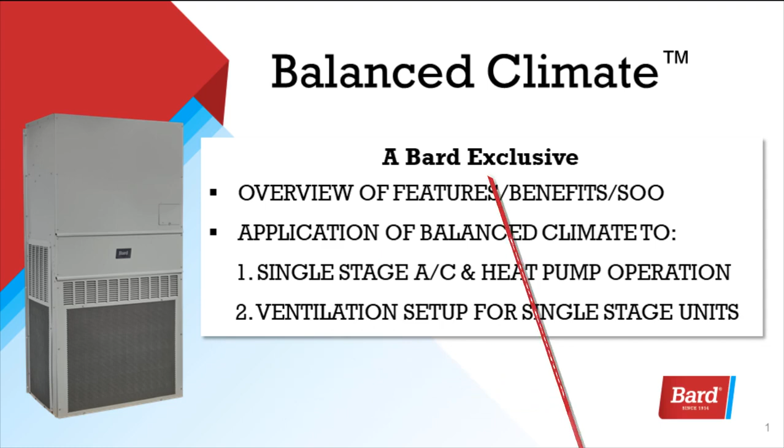Bard units are equipped with the capability of running in balanced climate mode as they are re-engineered to the 2019 Department of Energy standards. The remaining two-stage units already above the standard will have this feature added over the next 12 months as they are upgraded to the new cabinet style.

Balanced climate is designed to increase the comfort level by reducing indoor humidity. Extended runtime with reduced airflow allows the unit to extract more humidity during cooling operation. Balanced climate provides quieter operation, up to 35% less humidity in the space, depending on the model and conditions. It provides softer starts, warmer heat pump supply temperatures on startup, and increased comfort level.

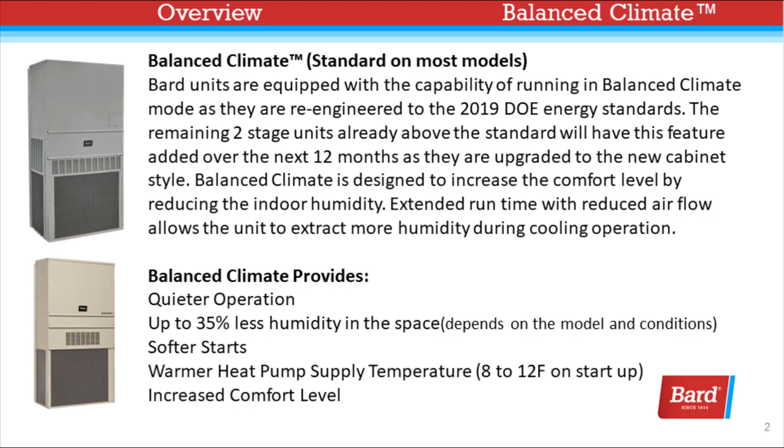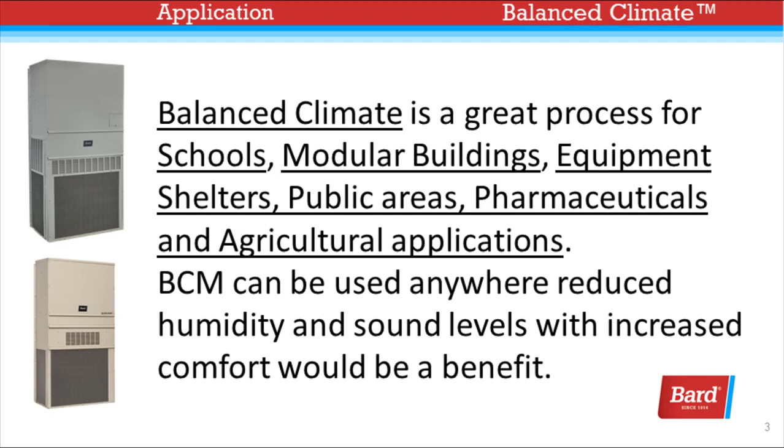Balanced climate is a great process for schools, modular buildings, equipment shelters, public areas, pharmaceutical and agricultural applications as well. Balanced climate mode can be used anywhere reduced humidity and sound levels with increased comfort would be a benefit.

All units are shipped set up to run in standard mode, just the way Bard units have been in the past. To engage balanced climate mode, simply remove the brass jumper as seen on the right between Y1 and Y2, and install a two-stage thermostat.

This applies to single-stage applications where the lowest set point is 72 degrees and no vent package is installed. Applications requiring a lower set point than 72 degrees may cause icing on the evaporator.

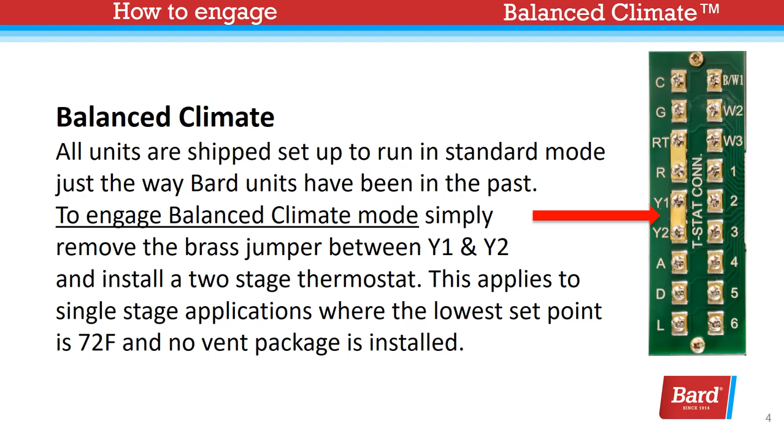Y1 will automatically bring the air conditioner on in balanced climate mode and extract the maximum amount of moisture while cooling the space. If the temperature continues to rise, stage 2 on the thermostat, Y2, will gently shift the wall mount to standard full load cooling with the rated airflow.

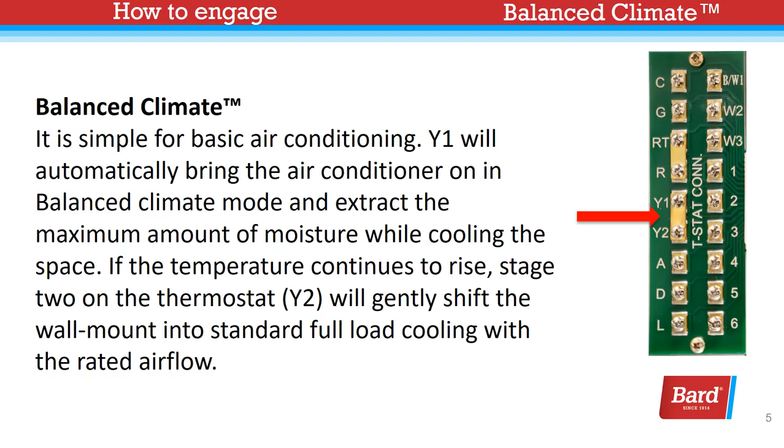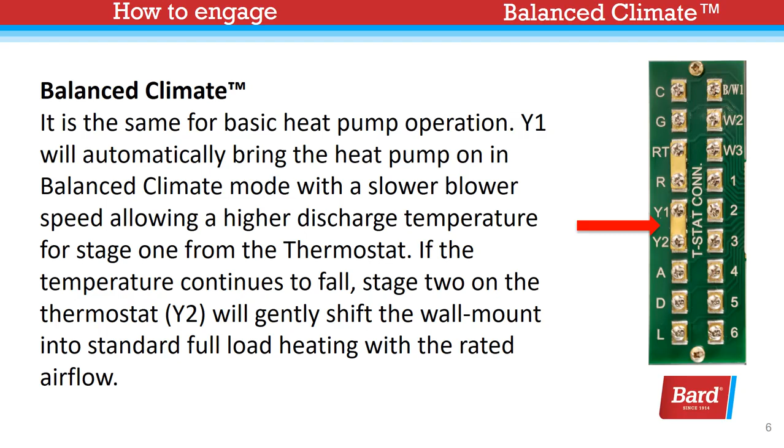It is the same for basic heat pump operation. Y1 will automatically bring the heat pump on in balanced climate mode with a slower blower speed, allowing a higher discharge temperature for stage 1 from the thermostat. If the temperature continues to fall, stage 2, or Y2, will gently shift the wall mount into standard full load heating with the rated airflow.

At the top left, the 3-ton unit, you can see 95, 80, 67 conditions produced a 24% increase in latent cooling or moisture removal. At the bottom left, 95, 75, 62 conditions, balanced climate mode latent cooling increased by 52%. For more balanced climate data, please see the model specification sheet.

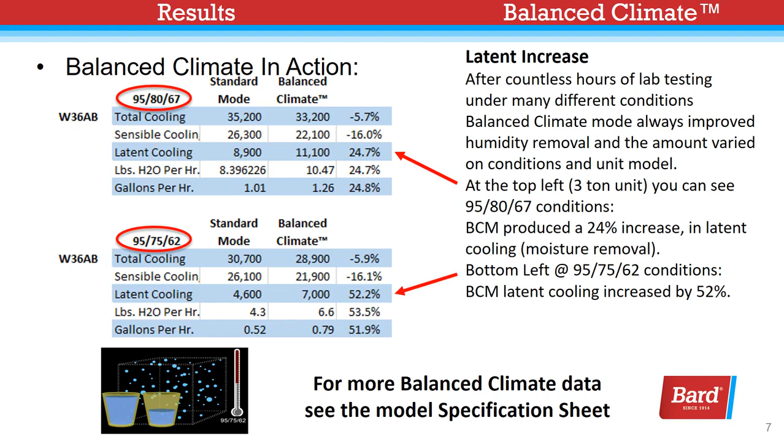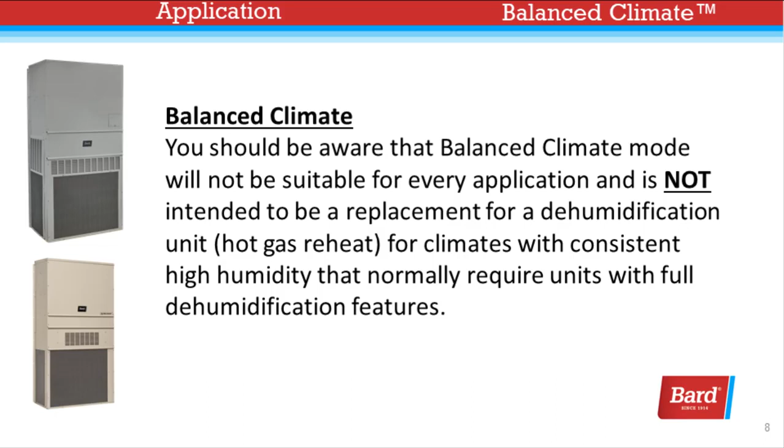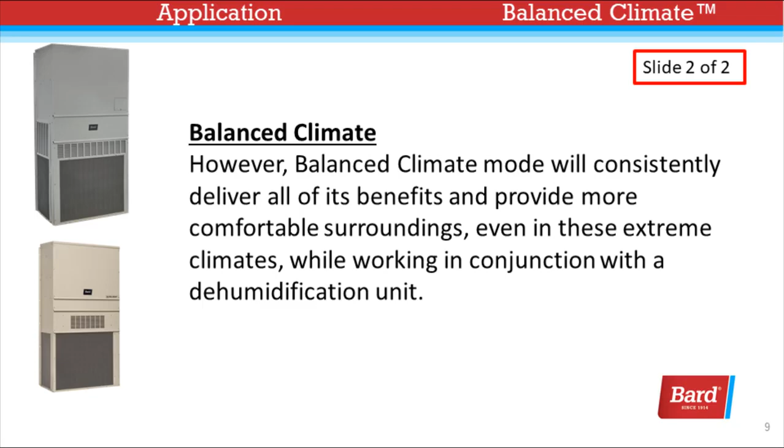You should be aware that balanced climate mode will not be suitable for every application and is not intended to be a replacement for a dehumidification unit or hot gas reheat for climates with consistent high humidity that normally require units with full dehumidification features. However, balanced climate mode will consistently deliver all of its benefits and provide more comfortable surroundings even in these extreme climates while working in conjunction with a dehumidification unit.

Also, on applications where the sensible BTUs are very close to your required BTUs, enabling balanced climate may not be the right decision. Remember, we convert some sensible BTUs to latent BTUs for dehumidification purposes.

Units with a factory installed economizer will not have the brass jumper installed. Refer to the vent manuals for instructions on how balanced climate works with each vent. There is a jumper located in the economizer to disconnect. Refer to the manual for detailed instruction.

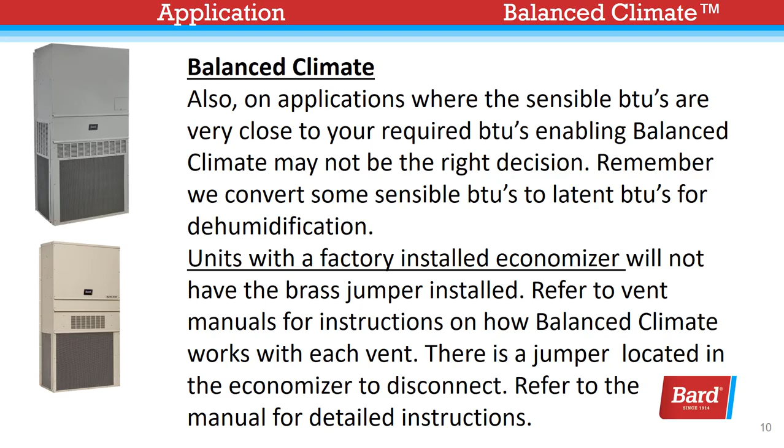If the application is likely to require air conditioning operation below 60 degrees outdoor conditions or is installed with any ventilation package, a Bard low ambient control kit must be installed.

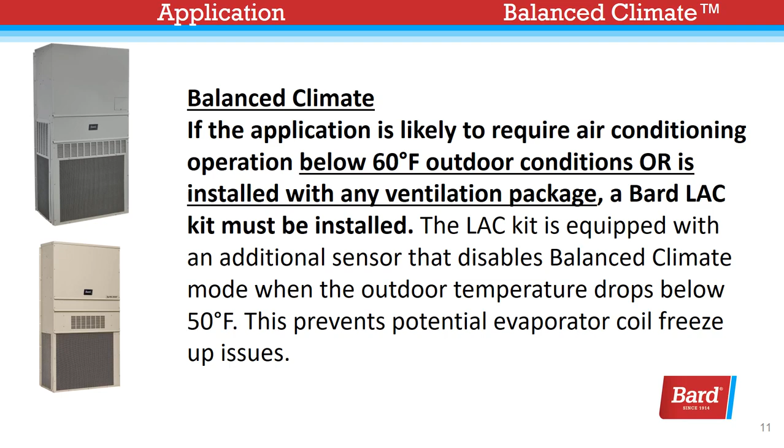The low ambient control kit is equipped with an additional sensor that disables balanced climate mode when the outdoor temperature drops below 50 degrees Fahrenheit. This prevents potential evaporator coil freeze-up issues.

Because part of balanced climate depends on lower airflow, attention needs to be directed toward the system static pressure when balanced climate mode is engaged. The system static pressure needs to be verified below 0.2 of an inch water column.

For ductless applications with the correct registers and grills, there won't be a problem. However, some ducted systems will not be a good candidate for balanced climate.

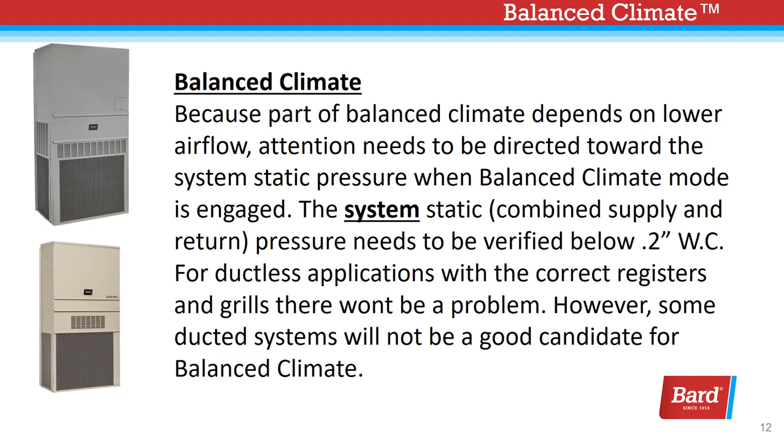Here we're looking at single-stage systems with no vent package. To operate a single-stage unit in balanced climate mode, a two-stage cooling thermostat is required. The lower indoor airflow operation is overridden by using that two-stage stat.

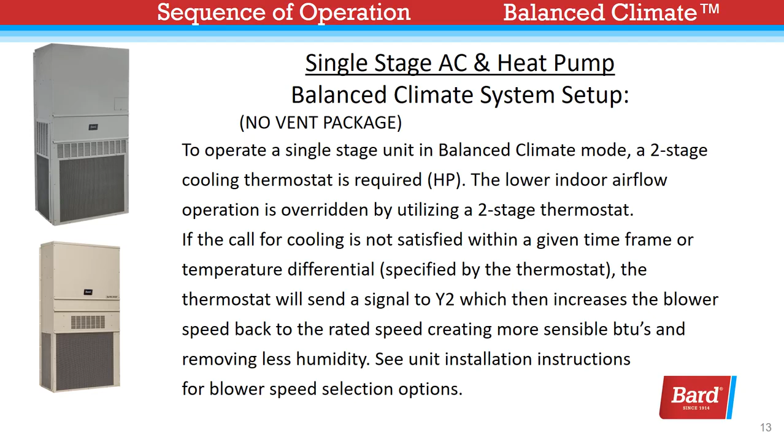If the call for cooling is not satisfied within a given time frame or temperature differential as specified by the thermostat, it will send a signal to Y2, which then increases the blower speed back to the rated speed, creating more sensible BTUs and removing less humidity. See unit installation instructions for more blower speed selection options.

With a vent package, setup will vary depending on the type of ventilation package selected. For complete instructions, please review the instructions shipped with the vent or unit if the vent is factory installed. The following slides are an overview.

The available vent options are barometric with exhaust and without exhaust, and there's no additional setup for these. The M vent option is a commercial ventilator with a simple on and off. The V is for variable on a commercial ventilator. D is for a DDC economizer with a 0 to 10 volt motor and no controls.

S, Y, and Z are economizers utilizing the Jade control, and the R package is for an ERV.

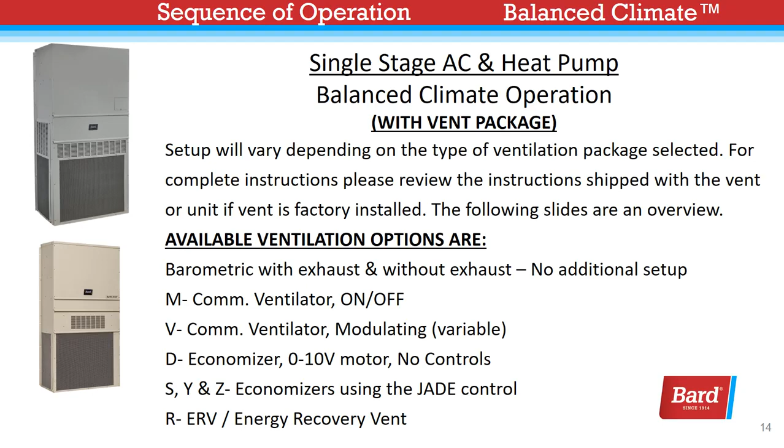For an M package, which is a partial flow commercial ventilator with simple on and off operation, units ordered with this option or field installed vent kit are shipped with a jumper from Y1 to Y2 installed. Removing this jumper activates balanced climate mode.

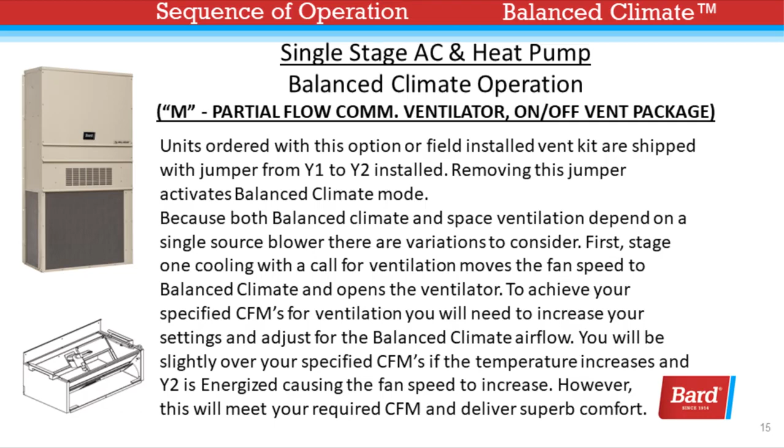Because both balanced climate and space ventilation depend on a single source blower, there are variations to consider. First, stage 1 cooling with a call for ventilation moves the fan speed to the balanced climate and opens the ventilator. To achieve your specified CFMs for ventilation, you'll need to increase your settings and adjust for the balanced climate airflow. You'll be slightly over your specified CFMs if the temperature increases and Y2 is energized, causing the fan speed to increase. However, this will meet your required CFM and deliver superb comfort.

Blade adjustment for desired ventilation air. Remember, on all the vent packages, the amount of ventilation air is dependent on 4 factors: return air duct static pressure, supply air duct static pressure, indoor blower motor speed, and the damper blade open position.

So in all cases, Bard recommends an air balance. In lieu of an air balance, we give you some suggested settings that should get you very close to what you're looking for. Refer to the appropriate graph in the manual and be sure to compensate for the balanced climate mode fan speed.

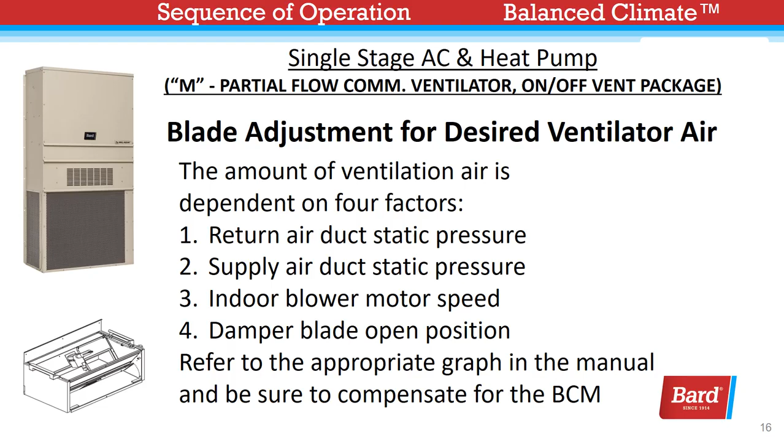For the V package, which is a commercial ventilator with variable blade operation, when engaging balanced climate with the modulating vent package, follow the instructions included with the vent. During setup, the blade will need to be adjusted to a setting between 25 and 30% more air than required for ventilation to overcome the balanced climate fan speed and meet the ventilation requirements.

However, when the speed is increased on a Y2 second stage cooling call, you will be slightly over-ventilating. The code will be met and comfort for all. If a CO2 controller is used, the damper will automatically adjust for the correct number of occupants based on CO2 and fan speed. This is a recommended setup method.

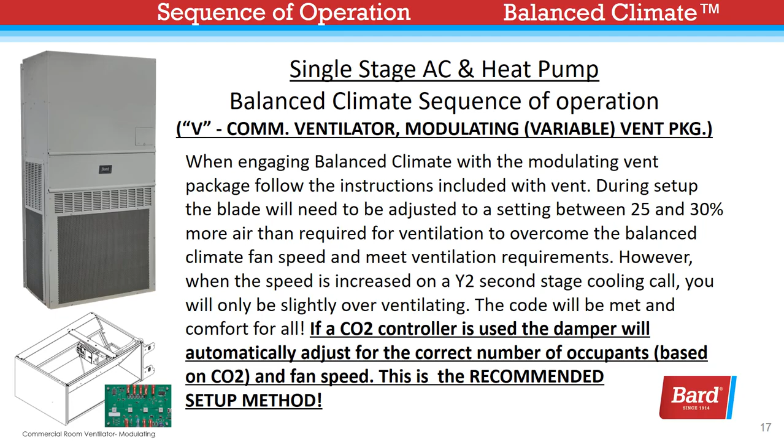When engaging balanced climate with the DDC economizer, the blade will need to be adjusted similar to the prior vent package. This is between 25 and 30% more air than required for ventilation to overcome the balanced climate fan speed and meet ventilation requirements. However, when the speed is increased on a Y2 second stage cooling call, you will only be slightly over-ventilating. The code will be met and comfort for all.

As long as you have the outputs available on your building system, you could change the blade location to correspond with the fan speed. If a CO2 controller is used, the damper will automatically adjust for the correct number of occupants based on CO2 and fan speed. This is the recommended setup method.

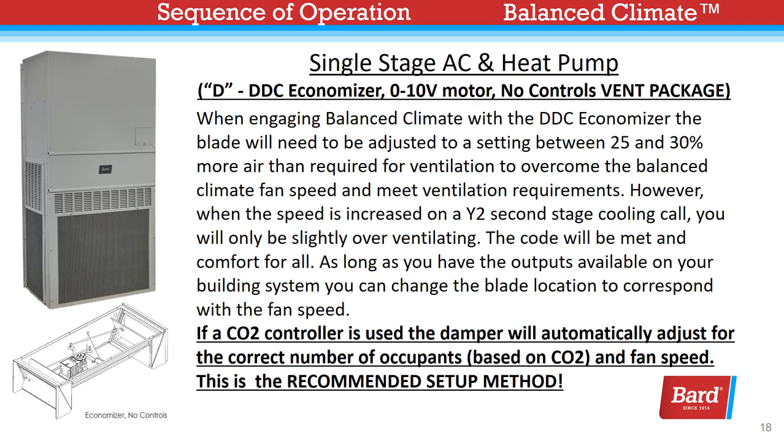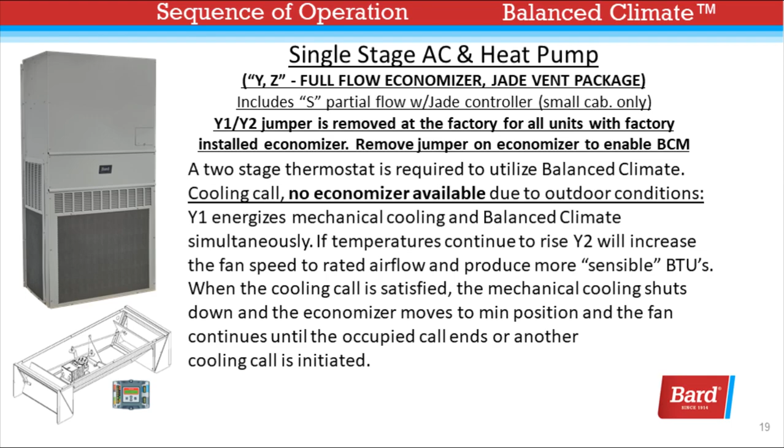For the S, Y, and Z Jade-controlled economizers, a two-stage thermostat is required to utilize balanced climate. If you have a cooling call and no economizer is available due to outdoor conditions, Y1 energizes cooling and balanced climate simultaneously. If temperatures continue to rise, Y2 will increase the fan speed to the rated airflow and produce more sensible BTUs. When the cooling call is satisfied, the mechanical cooling shuts down and the economizer moves to min position. The fan continues until the occupied call ends or another cooling call is initiated.

Here we have a cooling call with the economizer available. So in economizer-only operation, the fan operates at rated speed. The mixed air temperature sensor maintains discharge air preset temperature. If the temperature increases and more cooling is required, Y1 out and balanced climate are energized simultaneously.

So if balanced climate mode is utilized, you'll need to increase your minimum position setting by 25 to 30% above rated setup to compensate for the lower fan speed. If the temperature continues to rise and more cooling is needed, balanced climate mode will drop out, economizing will continue, and the fan will operate at rated speed along with mechanical cooling, providing the maximum amount of cooling. When cooling call is satisfied, the economizer will return to min position with rated airflow.

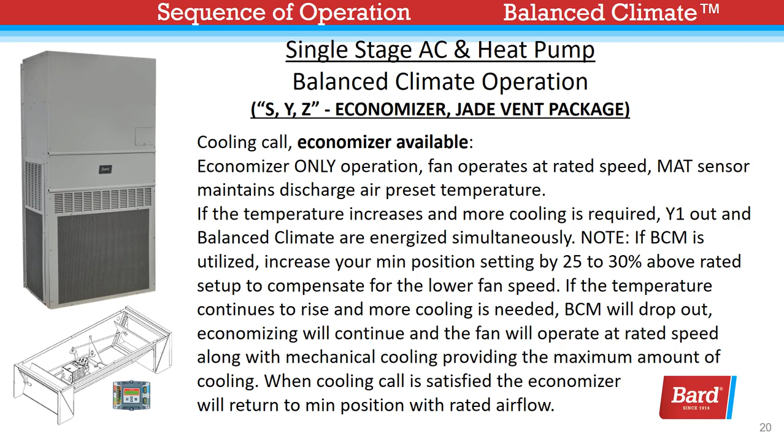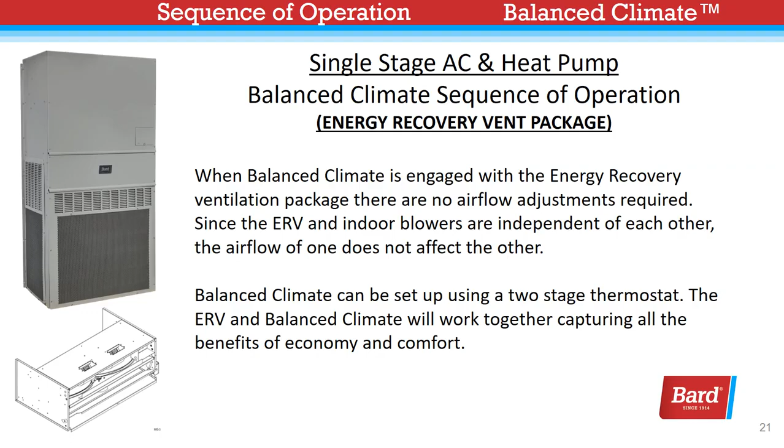When balanced climate is engaged with the energy recovery ventilation package, there are no airflow adjustments required. Since the ERV and indoor blowers are independent of each other, the airflow of one does not affect the other. Balanced climate can be set up using a two-stage thermostat. The ERV and balanced climate will work together, capturing all the benefits of economy and comfort.

Let's review this system. Bard's balanced climate mode will fit many applications. All applications require attention to airflow. We must have less than 2/10 of an inch of water column on the static pressure. The static pressure listed is system static, and that's combined supply and return numbers.

72 degrees is the lowest allowable cooling set point in balanced climate mode. If application requires cooling with the outdoor air temperature below 60 and/or a vent kit is installed, a low ambient control kit must be installed on the unit. A two-stage thermostat is required to activate balanced climate mode.

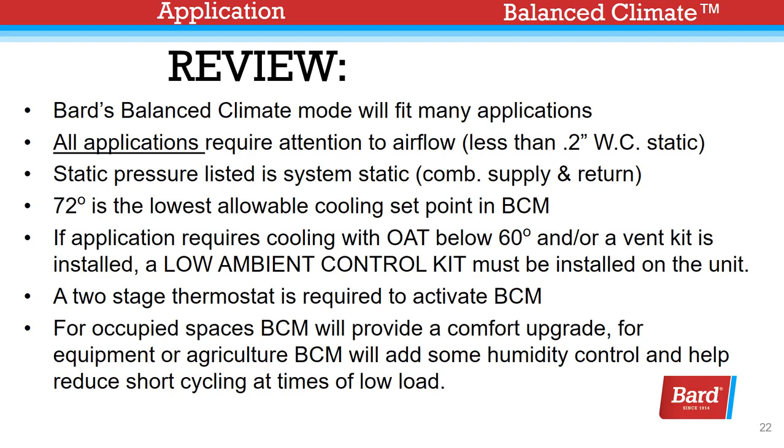For occupied spaces, balanced climate mode will provide a comfort upgrade. For equipment or agriculture, balanced climate mode will add some humidity control and help reduce short cycling at times of low load. Thank you for checking out our balanced climate video, and thank you for choosing Bard.